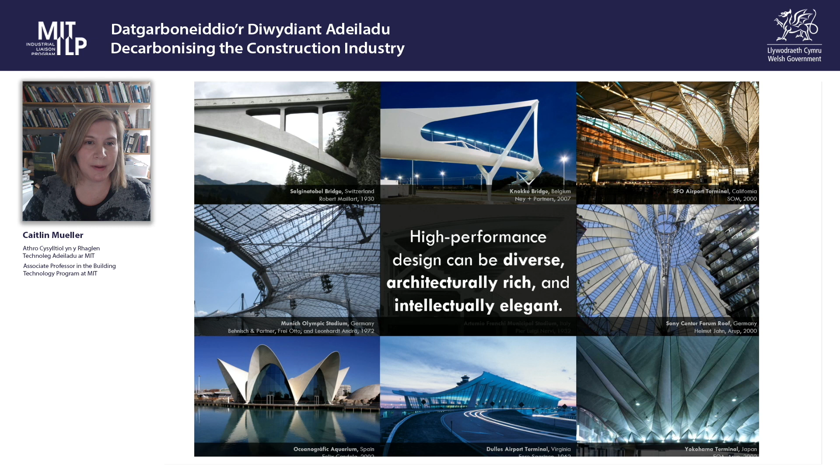And I show this when I start because sometimes when I talk about high performance design, people worry that I'm interested in a homogenization of the built environment or that all buildings should look the same. And I think it's really the opposite. We can really expand our human potential by using performance as one of the drivers in the design process for the built environment. It's also critical that we do this today. We have an enormous climate imperative to pay more attention to the performance of the built environment.

This is an example of two recent stadia built for the Olympics. On the left, the 2008 Olympic Stadium in Beijing. On the right, the London Olympic Stadium from 2012. They're both made out of steel. They're both large stadiums with the same purpose. The Beijing Olympic Stadium on the left uses 14 times the carbon emissions embodied in the materials per seat compared to the London Olympic Stadium.

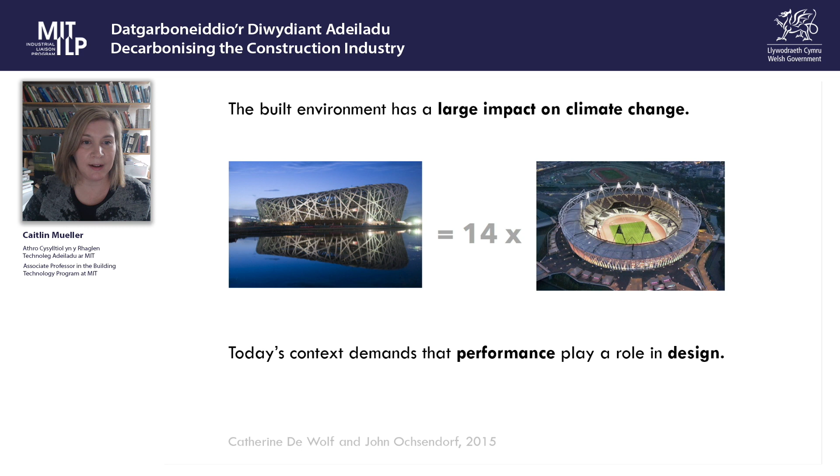So not 14% more, 14 times more. That's a performance differential that's really unbelievable. In any other sector, we would not see that kind of range. And it's because we haven't been paying enough attention to this for a long time. But today's climate imperative requires that we be more mindful about the emissions associated with buildings and infrastructure, and more particularly with the materials that we use to build them.

This is important and challenging. It's challenging to pay more attention to this because as we develop a design process, we usually don't know very much about it until we get to the end of the process. So our concept in the beginning is very open. We have a lot of freedom, we have a lot of potential, but it's very hard for us to understand how our design concept performs almost until it's too late.

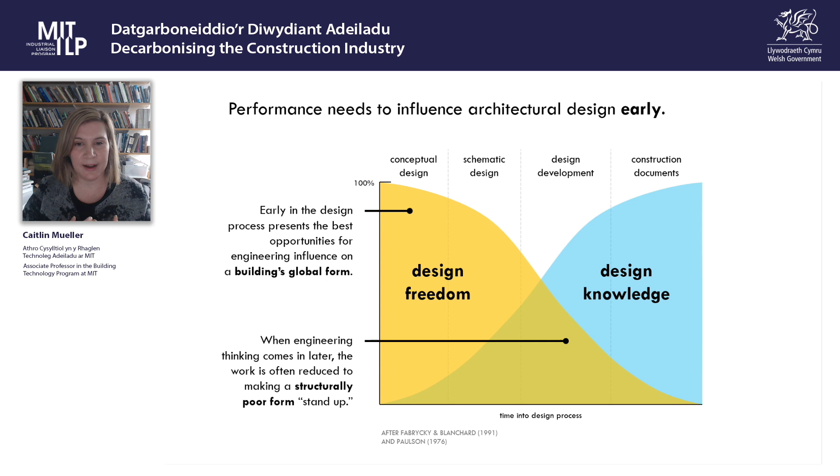And in an ideal world, we would use the principles of engineering and the principles of performance simulation as early as possible while conceptualizing a design. But too often, this happens really at the end. We're only using engineering to verify or validate a crystallized design concept rather than to help generate its key features.

This is also challenging because of the disciplines that affect the built environment that have a lot in common in terms of their interests, but are very separated and polarized in terms of how they are contemporarily conceived. So for example, the two fields that I work in, architecture and structural engineering, both work on buildings and infrastructure, literally the same objects, and yet the way they approach it are completely different and in many cases completely isolated.

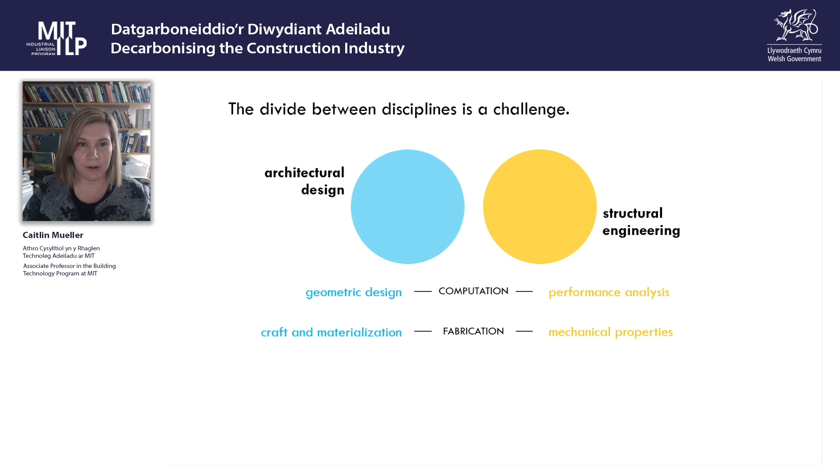So for example, the way computation is engaged is very different in architecture versus engineering. The way that we think about fabrication, construction, materialization is very different. And even the way we think about educating architects and engineers has almost no overlap. So in my work, I'm really interested in finding ways to bring these fields closer together so that we can engage a more integrated and synthetic process to lead to a better built environment.

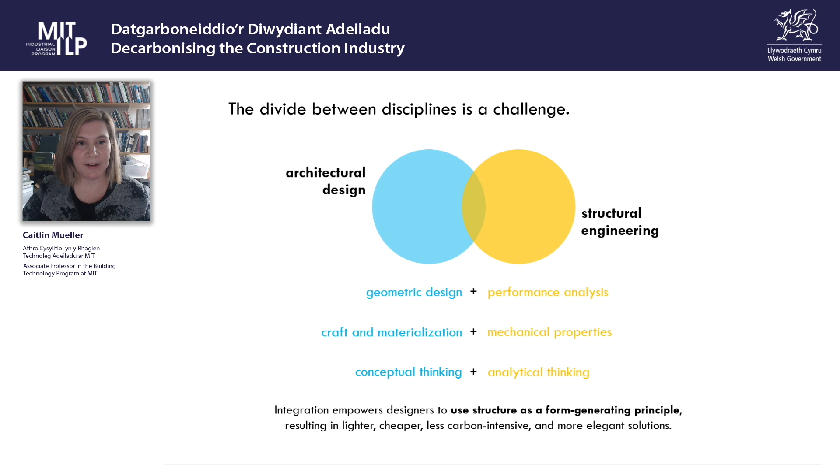And I think this is not only important in terms of the practical outcomes of using less material and using it more responsibly, but again, I also think this can advance our potential as designers and expand the palette of architectural form. I do a lot of this work through what I call the design space, and this is a computational technique for understanding both what a design's characteristics are and performance in a single kind of landscape that maps these two concepts together.

So in this example, this is a design space for a really simple structure for a truss that supports a given load. And I can change what this truss looks like by making it shallower or deeper or wider or narrower. And as I make those changes geometrically, it both changes the appearance of the truss and its efficiency. It changes how much material is required to support the load. And what these blue landscapes show is a mapping of that relationship between design and performance. This is the design space.

Using methods that have existed for decades, since before I was born, we can find the optimal solution in the design space. Those are here. There's a global optimum and a local optimum. And yet optimization methods, while very powerful, are almost never used in the design of buildings or infrastructure.

And I would argue that's because it's really hard for us to fully articulate the goals that we care about in design. We care about performance and minimizing carbon emissions and using less material. But in architecture and in buildings, we also care about a lot of other things that are really hard to mathematically express.

And so in my work, I try to balance the interest in performance-driven design with the ability to accommodate additional human considerations that are often really important in the design of buildings, for example.

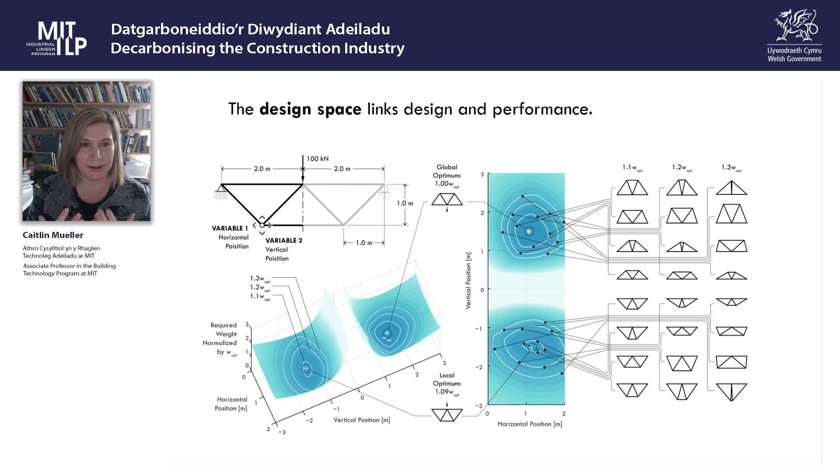In my work, I develop computational methods to try to understand and explore design spaces. This is an early tool that I built to do this called structureFIT, which designs long span trusses. You can think of them as bridges or roofs. And like the earlier example I showed, by changing the geometry of the structure, you can also change its performance.

And what this tool allows you to do is visualize a range of possible options for a truss, understand the numerical performance. Here, a lower number indicates better performance, less material required. It's normalized by the amount of material required by the original idea, so less than 1 means we're improving.

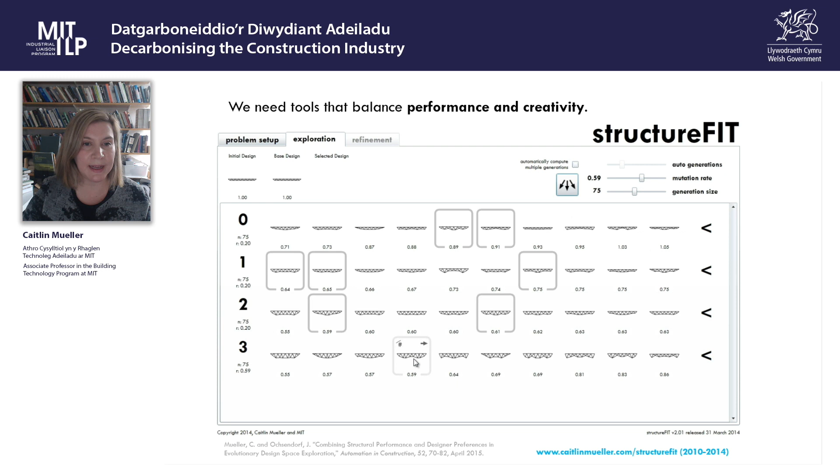And it uses an interactive evolutionary algorithm that allows a human and a computer to collaborate, to explore and evolve designs together, to find designs that meet the preferences that the designer indicates through selection, but that are also moving towards higher performance. So this is an alternative to optimization that I think is more relevant for the design and construction sector, where we're able to balance the criteria that we can express in the computer and those that rely on human expertise and intuition.

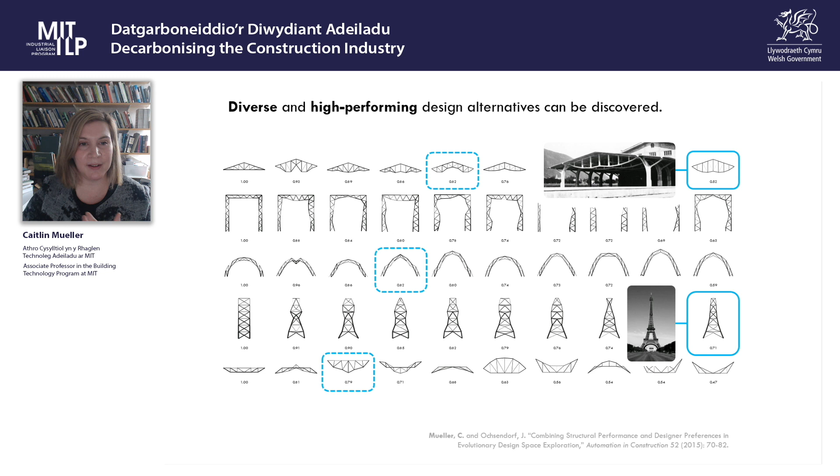But what I also find interesting about this range is that there are other designs that are not the solution to any optimization problem, but that might be the most interesting from the perspective of the designer, the occupants, human society, and that are also very high performing. So this is an approach that allows us to balance these goals and make it more relevant for real applications.

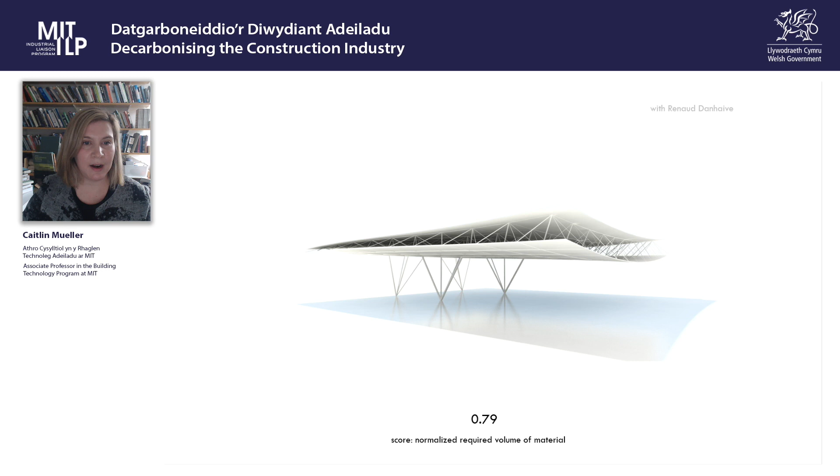When we move into more complicated structures, in 3D, for example, we can see the same principles apply, that there are diverse possible solutions that are high performing. And in 3D, there are even more possible load paths. So for example, this is what we call a design space catalog of interesting good solutions. Again, a lower number is better. Again, the number corresponds to material consumption or carbon emissions.

And what we see here is that there are so many different ways to express performance visually, and different people or different cultures or different regions might choose to use different designs. All of them are high performing, and all of them are discoverable through these computational methods.

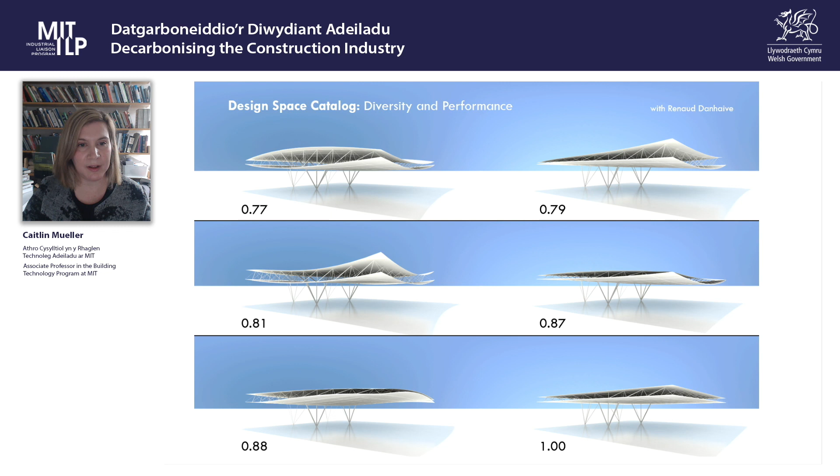We also use techniques such as multi-objective optimization, which is a method that allows you to compare multiple quantitative goals in a design process. This is really important in the design of buildings and infrastructure because almost always we have more than one goal, and often those goals are competing with each other. If we only design for one, we could seriously miss out on the other.

So for example, in this design, we're looking at a shell roof structure, kind of a long span, interesting roof, whose shape dictates both its structural efficiency and the amount of energy that is required to condition the space. Traditionally, these two concerns are studied entirely independently by different types of consultants with different backgrounds. There's very little collaboration. This technique, multi-objective optimization, allows us to start to integrate and synthesize these different concerns to find solutions that balance them.

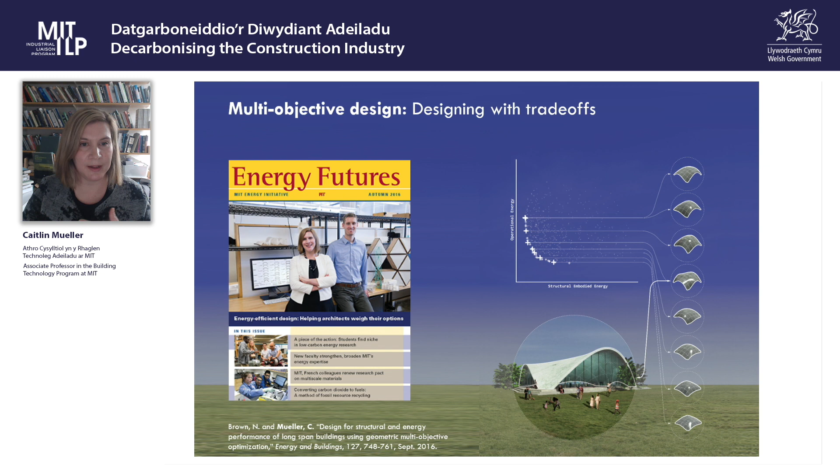What we see here in this curve, this is called the Pareto front. And this shows the designs that represent the best trade-off between the two objectives. And we use this technique widely in a lot of different applications.

We're also really interested in how to make the simulation methods that we use to measure performance more relevant and accessible in early stage design when they can have the most impact. And this is in response to many studies on human-computer interaction that have shown that when the computer is too slow, it really disrupts the creative flow, and it's not really useful in an early stage creative process.

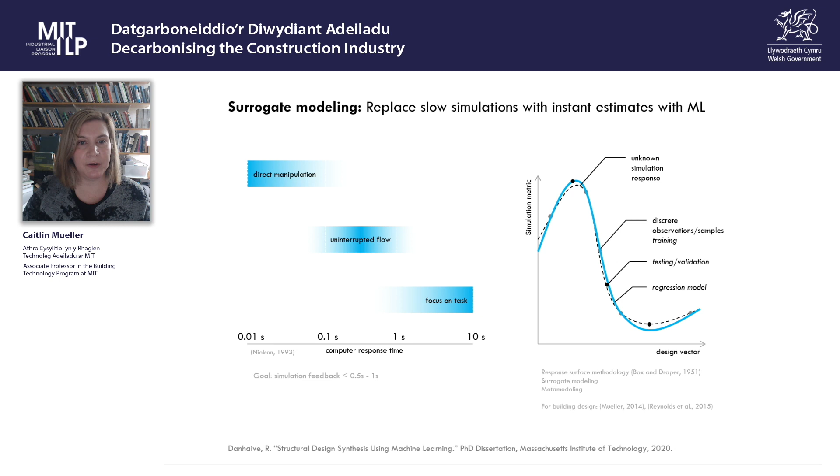And many types of simulation, cost estimation, finite element analysis, computational fluid dynamics, the kinds of things that provide important information for designers, are too slow to be used in their natural state in an interactive, design-friendly way. So we use a technique called surrogate modeling, which is a machine learning technique that replaces these important but slow simulations with a data-driven model that allows us to use this information fluidly and instantaneously in a design process through a predictive model. Here's an example of what that looks like.

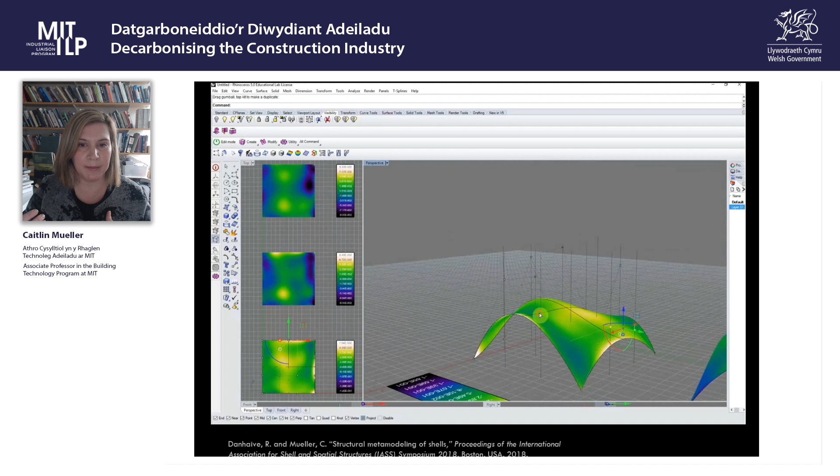Here a designer is creating another long span roof with an interesting form. The shape of the structure directly impacts, again, how it behaves, and it also affects, of course, how it looks. Here, the designer is able to work within an interactive design environment, a 3D modeling environment, and instantaneously get the results from a finite element analysis. It's a surrogate model, so it's a prediction, as they change the shape of the design.

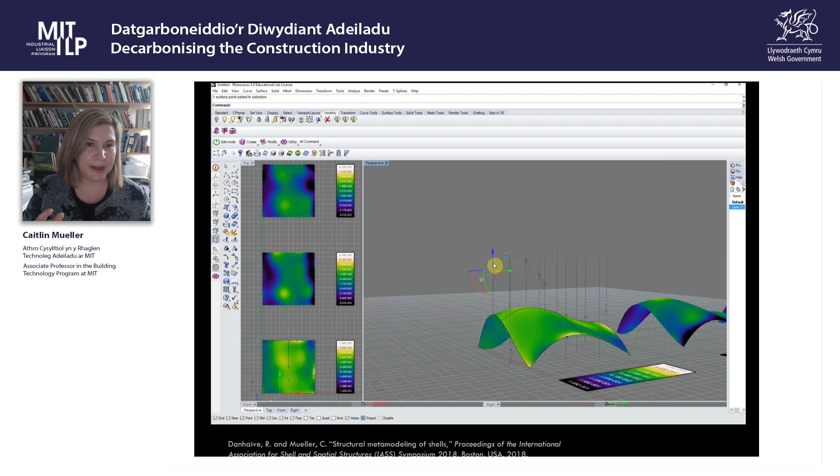Here, the color fields represent displacement of the structure in X, Y, and Z, but they could also represent stresses or other relevant information that traditionally takes place in a different software tool that is relatively cumbersome to interact with design frameworks.

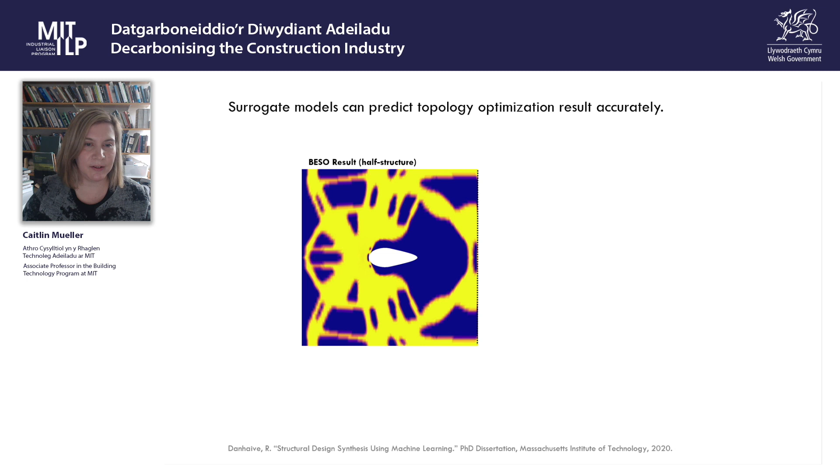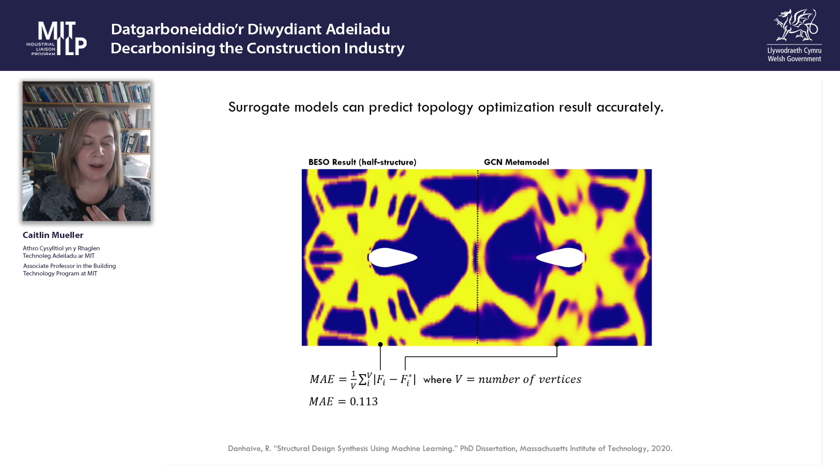We can also use this kind of surrogate model to predict even more complex fields of information for a design. Here, we're using a technique called Topology Optimization, which allocates material optimally within a design domain. For example, this is another roof with an interesting rib structure. Topology optimization takes a long time to run and is typically not used in early stage design, but we were able to build a surrogate model where we can predict the optimal distribution of material for a structure under a given load with a machine learning model that works really well across a diverse range of conditions.

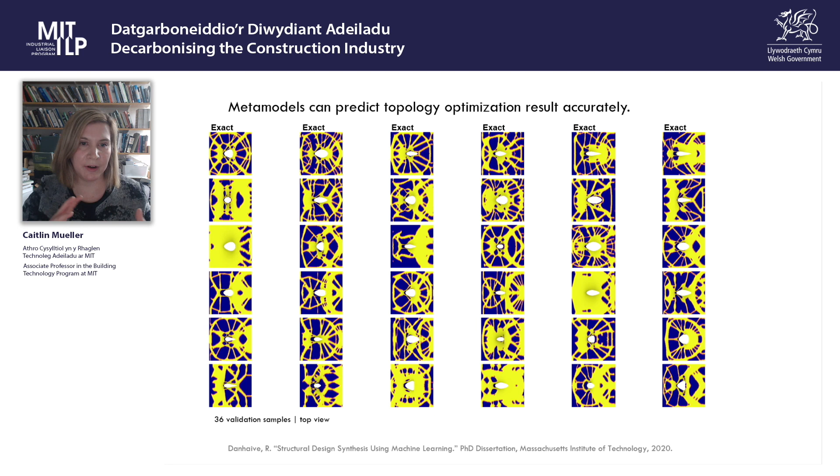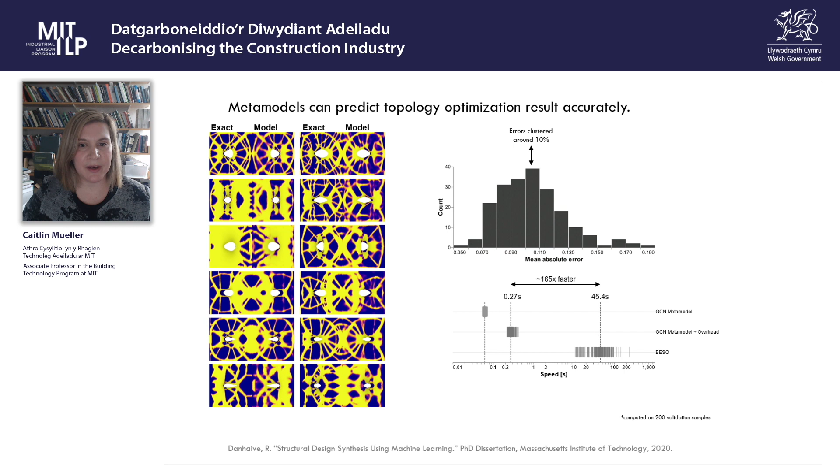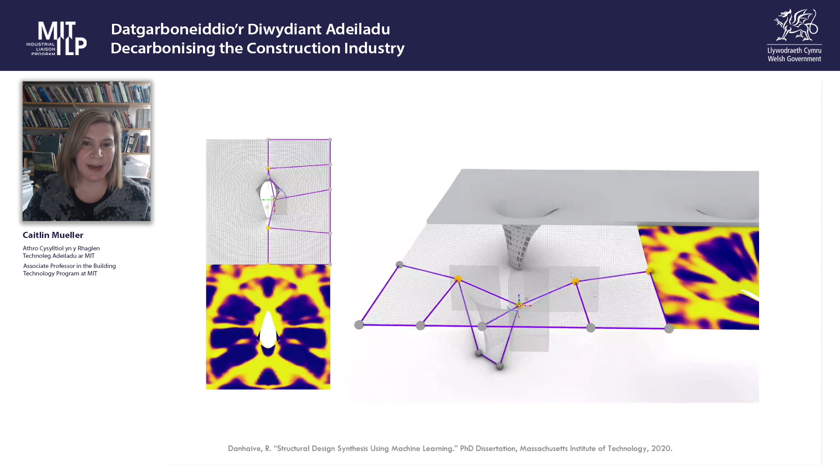So each one of these designs is the roof seen from above, and with different geometric properties, there are different optimal material allocations, and our model predicts them almost perfectly and works incredibly quickly. And the outcome of this is that we can then, again, turn this kind of sculpting environment of the designer into an environment that is also an engineering toolbox, where simultaneously we're understanding form and space and architectural concerns, but also getting physics and engineering information about material consumption and performance, and here even understanding what that means in terms of spatial and formal material allocation.

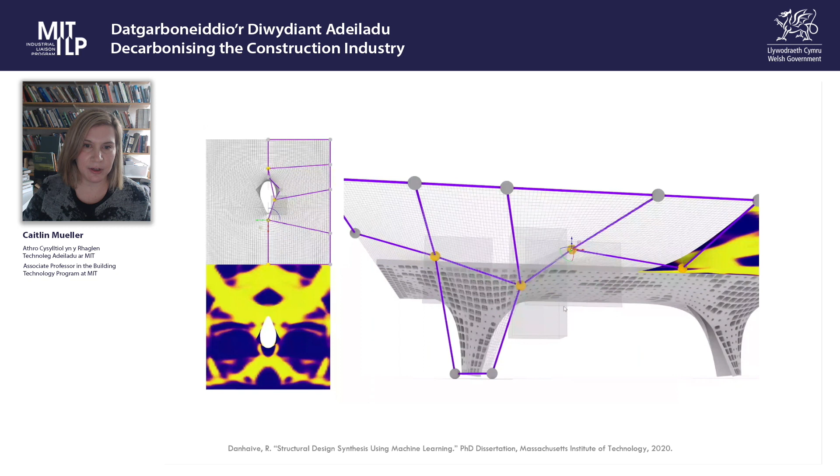This is a process that with traditional tools would take weeks or months and therefore is almost never used in construction today. But in the future, now that we can do this so quickly and in such a fluid and seamless way, this could become kind of standard in an architect's and an engineer's toolbox for early stage design.

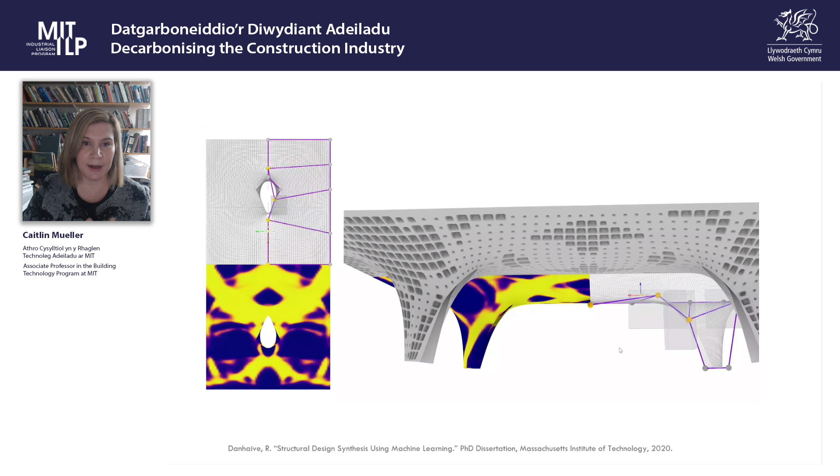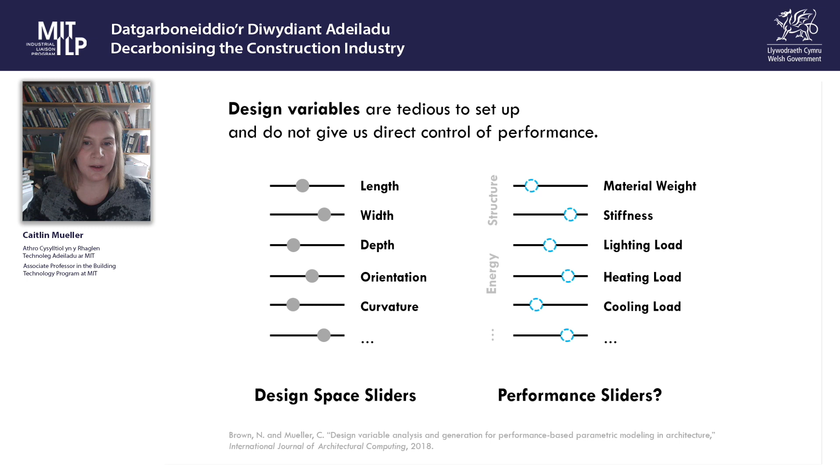We're also interested in thinking more generally about where designs come from. How do we come up with design ideas? And even today, with all the advances of computation, design ideas still usually come from kind of our own brains. But what if we could use computers to help guide us towards designs, not necessarily through optimization, but through a better understanding of the relationship between design variables and geometry and performance? Here we're proposing doing that where we start to build this inverse model between performance and geometry. And we can do that with a range of statistical techniques.

Here we're using something called principal component analysis, which is a technique that allows us to find patterns in data. So we do this by simulating large numbers of possible designs. In this case, these are structures, and identifying the directions in the design data that correspond most with the performance metrics that we're interested in.

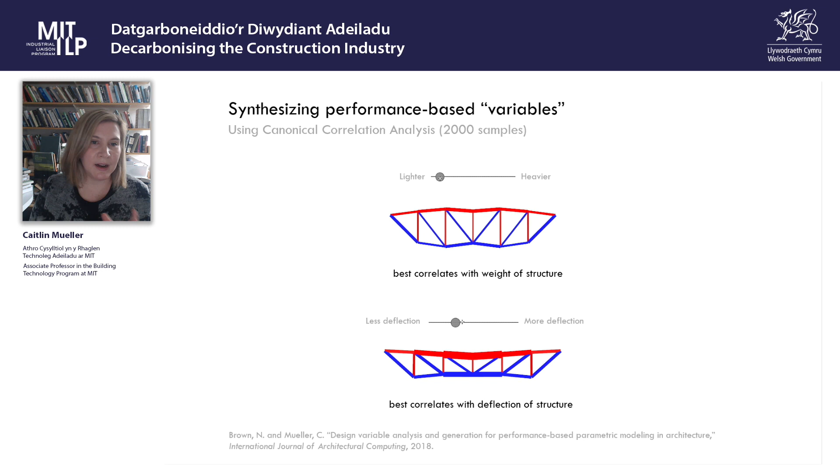And what we see is kind of a new way to understand the design space. This is a synthetic design space where the computer has pointed us in the right directions. It hasn't told us the solution, but it's helped us create our own little brainstorming tool where we can understand variations of design options and how they correspond with performance. And we can do this in even more complex ways with recent advances in machine learning, in particular with so-called generative modeling or latent modeling, where we can find low-dimensional representations of high-dimensional design data.

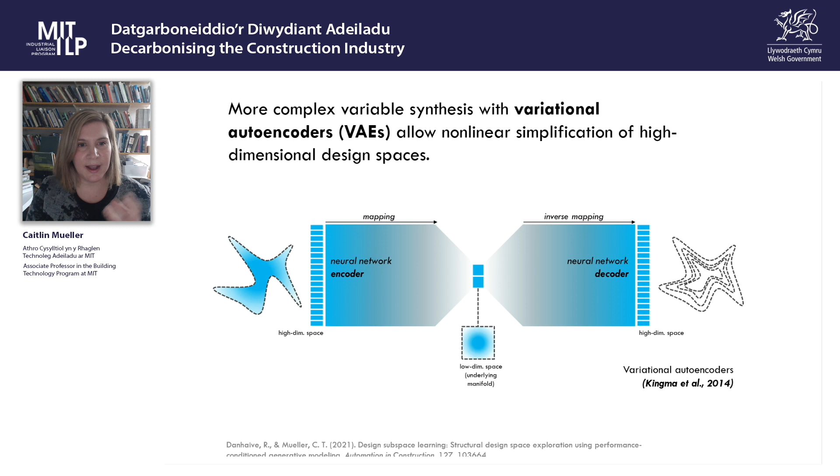So for example, a design space that contains tens or hundreds of variables and is really too hard for us to navigate as humans and understand those relationships, we can start to use these machine learning models to build that understanding and to project the high dimensional information down into what we call a low dimensional latent space, governed by performance. And I won't go into a lot of detail about what this does, but it's a way for us to create bespoke visualizations and design spaces of different design alternatives that all perform really well but are significantly different from each other, and allow us to find the relationships between them.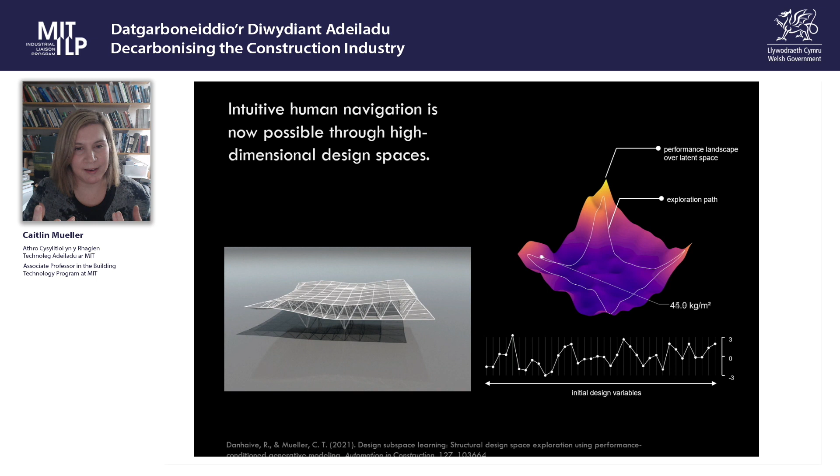So if I like a design over here in the space and my collaborator likes one over here, we can now find the pathway through the design space and start to use that as a way to compromise between these options. And here you can see this roof is morphing and changing in response to the sort of variable projection, but it's also always showing us high-performing designs. And this is a way for us to exploit the fact that the design space almost always has lots of good options. We just need to find where they are.

In addition to the work that I do with computational design and trying to make performance-driven design more accessible and relevant to the construction sector, I'm also really interested in the question of construction itself. And one of the things that I found in my own research is that almost always the designs that I'm able to generate on the computer that I claim are really high performing, that can use very little amounts of material, that achieve really high stiffness, are almost always very complex geometrically.

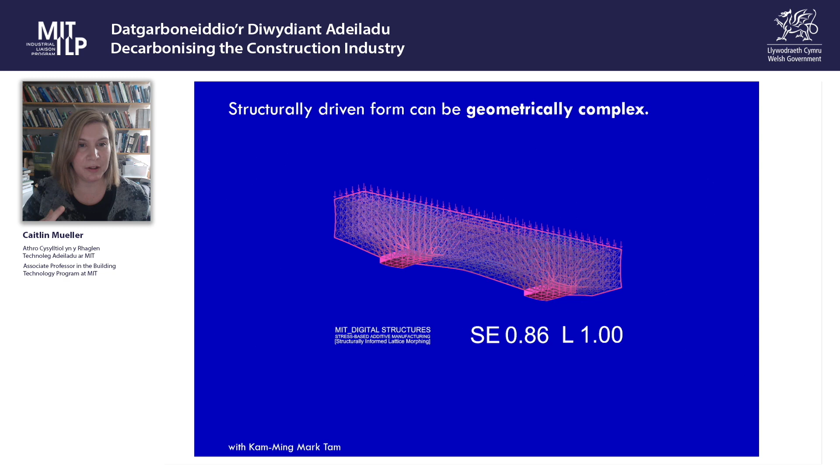And that's because the physics of structural load transfer has a lot to do with the physics of nature. When we look at high-performing structures in nature, they're not rectilinear, right? They're not orthogonal boxes. There are these curving, amazing trajectories of stress through space. And that's what these high-performing structures also look like. But they're very incompatible with 20th century means of construction, where we really prioritize standardization. So how can we overcome that? I would argue it's really important that we overcome that, that we find ways to economically build high-performance designs, even though they're complex. So how do we deal with this complexity?

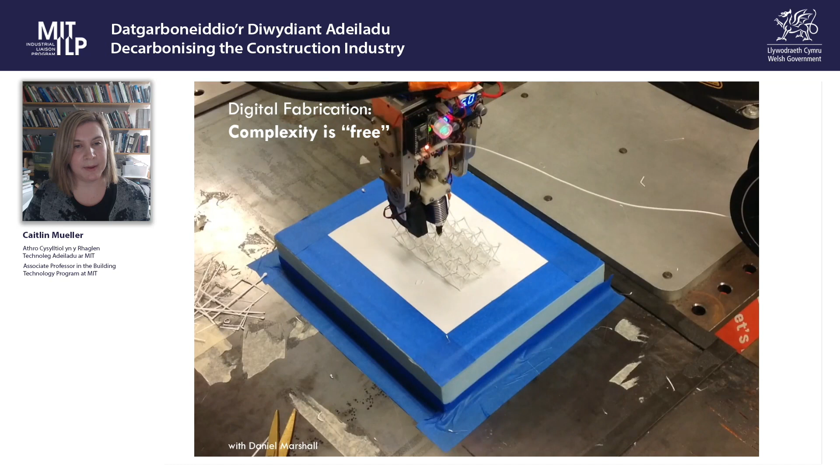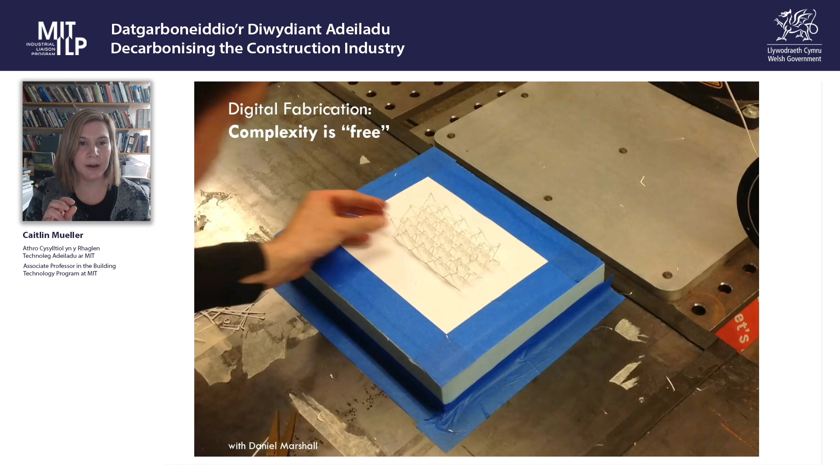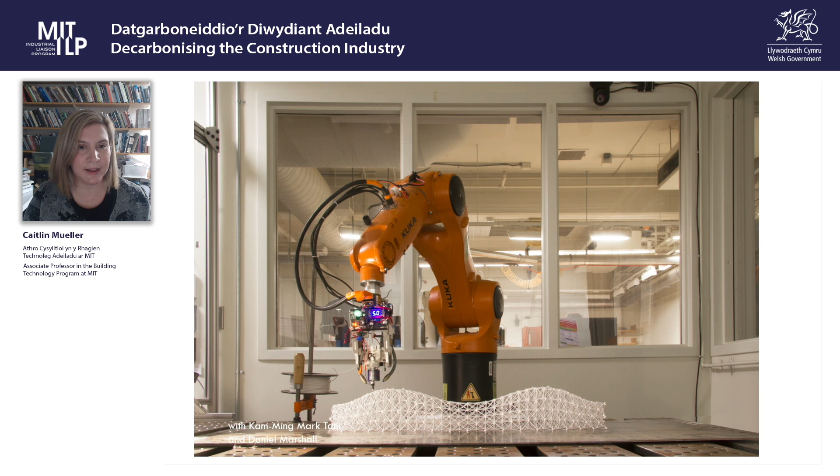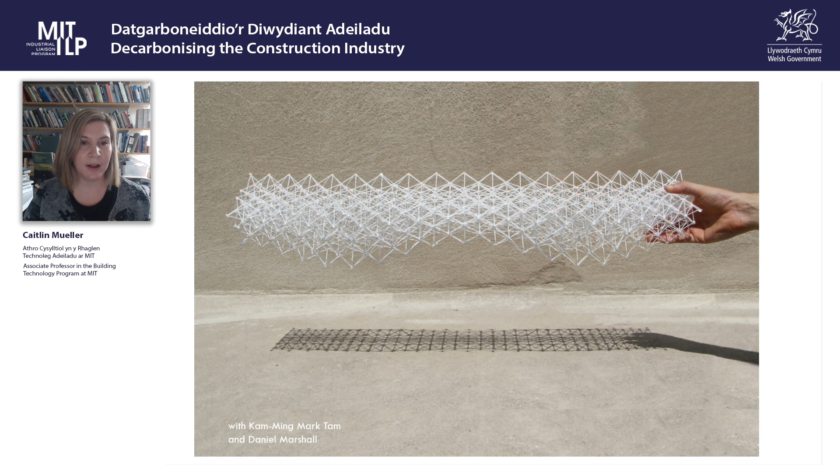One possible way forward is through automation in construction, through in architecture what's called digital fabrication or computational fabrication, where we take advantage of the dexterity and programmability of machines and use that to build structures that are indifferent to geometric complexity. This is an example of a technique we built in our lab where we mounted a 3D printing extruder to a 6-axis robotic arm and allowed it to make spatial trusses. And the robot doesn't care if every joint is the same or if every joint is different. It's just as easy for it to make this either way. And it allows us to start to really materialize these structures that we know from our computational work are highly efficient, much more efficient than their standardized alternatives, and to do so in a way that is economically competitive.

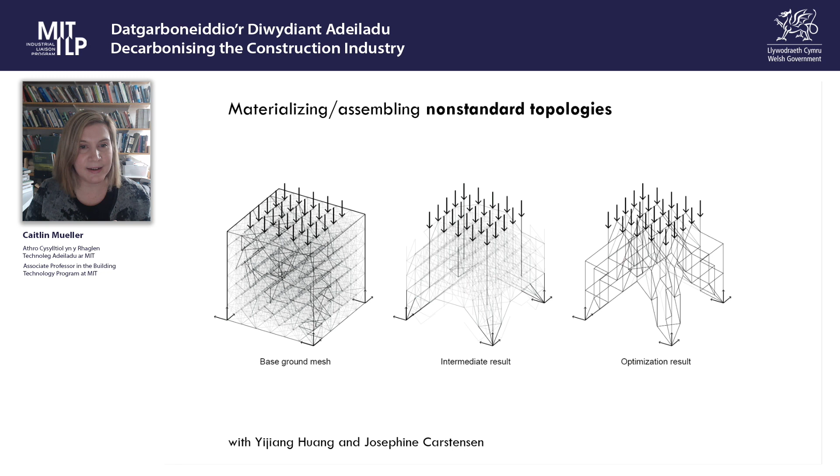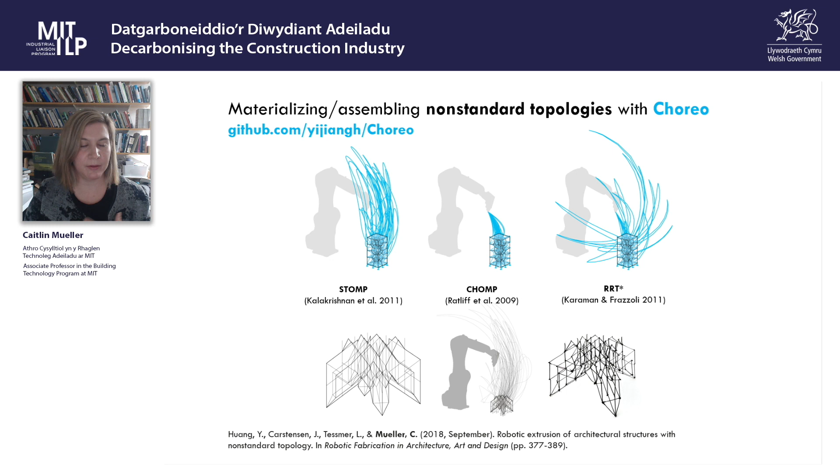We also do this for structures that are even more complex in terms of how their interior components are arranged. This is an example, again, using a type of topology optimization where we find the absolute ideal position for every element in the structure. And the absolute ideal position from a structural perspective is not ideal from a traditional construction perspective. But with robotics, we can find ways around this. And we've been working with state-of-the-art techniques in task and motion planning from robotics to automate the process of figuring out what the robot should do. We give the robot a design and we run our algorithm and compute the load path or the tool path for the robot to execute.

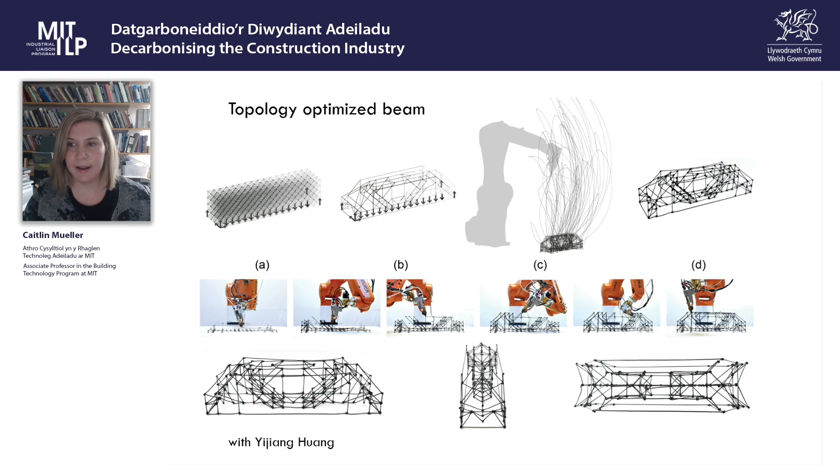And what it looks like is something like this, where we can take, this is a small model of a topology optimized beam, but the same principles apply at full scale. And we're able to build it pretty easily with a robot in a fully automated way. This is a design that if I were personally trying to build this myself with my hands, I would struggle with immensely. And yet for the robot, this is no problem at all.

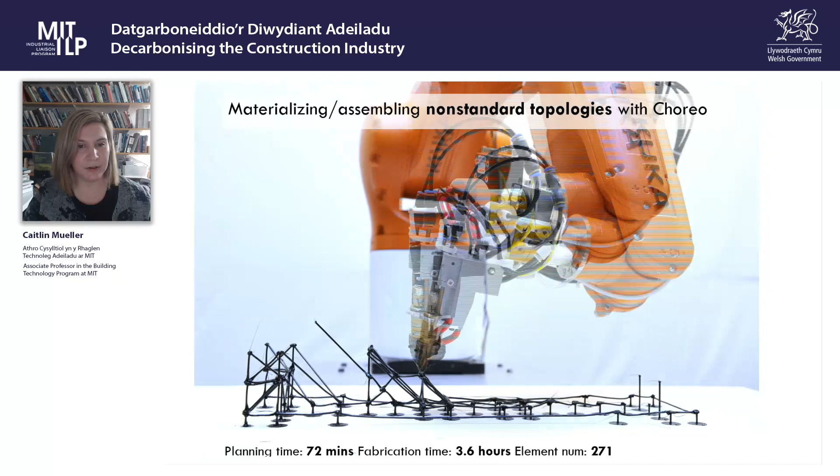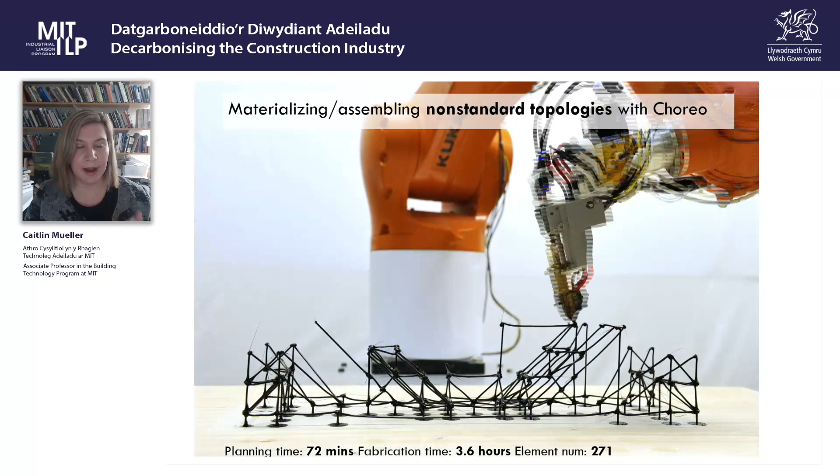And what our algorithm does to work with the robot, it not only considers how to build the structure, it finds the optimal sequence, or it finds a high-performing sequence for the structure to be constructed so that the robot doesn't collide with the structure under construction or itself. And it also makes sure that the structure is stiff enough during its partially assembled state for it to be completed.

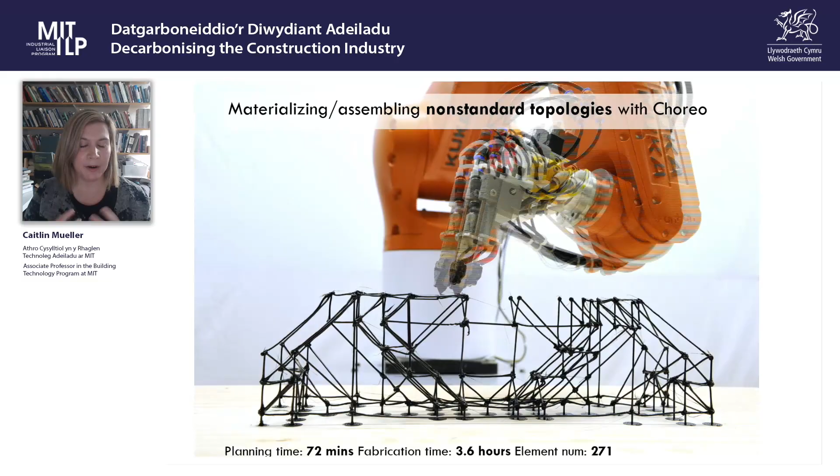So we can add all of these different constraints into the task and motion planning platform, and even have multiple robots collaborate together to create complex structures. So this is an extension of that work where 3 robots are working together to assemble an efficient but complex structure.

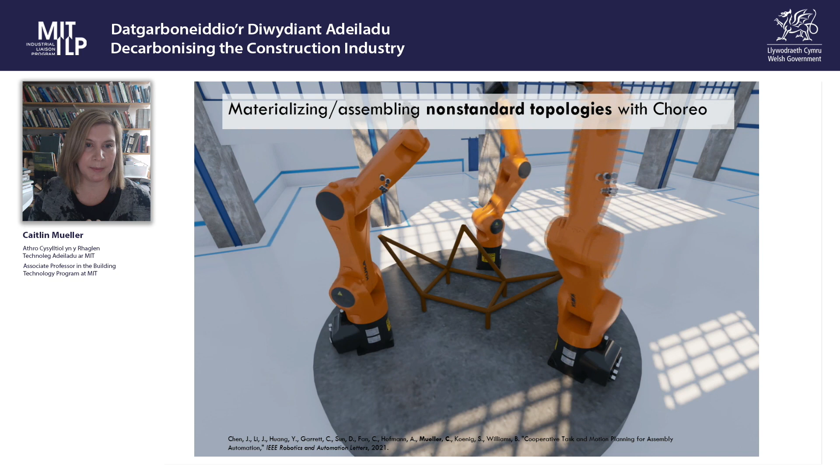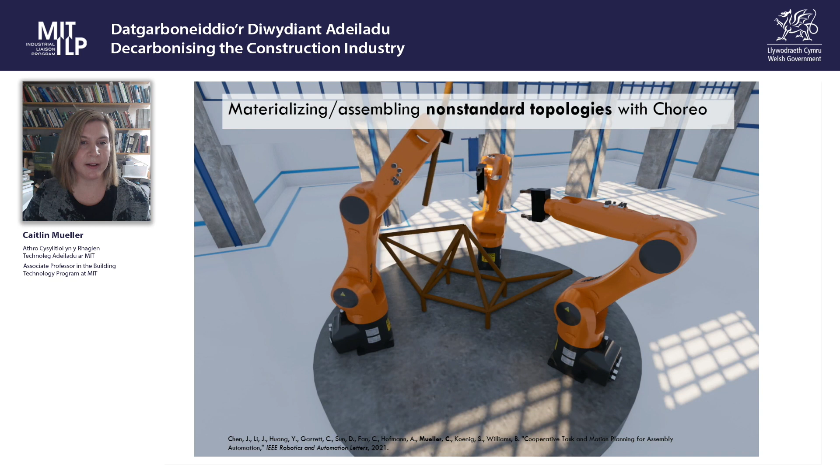The idea is not necessarily to fully automate construction. We would, for example, still have a human come and assist with the welds between these elements. But what the robotics allows us to do is to be very precise and to remove a lot of the challenge of assembling something irregular or non-standard that's driven by material efficiency.

We also apply the same kinds of thinking and techniques to more practical problems that are of urgency and impact today. One area that we've done a lot of work in is looking at reinforced concrete construction, especially in the global south, where we're seeing an immense amount of urbanization and need for housing and construction more generally.

What we see in this part of the world, and really in most parts of the world today in concrete construction, is a lot of material that's not necessary structurally, but is there in order to make construction easier. So for example, large flat concrete slabs that span between beams or span directly to columns. We know that that's not the most efficient way for us to support loads, and yet we typically do it because we have the sense that it's much easier for us to build something this way and therefore much cheaper.

But the opportunity, if we reconsider this, is enormous. If we carve away the material that we don't need structurally and find a way to build these types of structures economically, we can save 60, 70, up to 80% of the material, of the embodied carbon and the embodied energy in these systems. And in many parts of the world, material costs also dominate total construction costs.

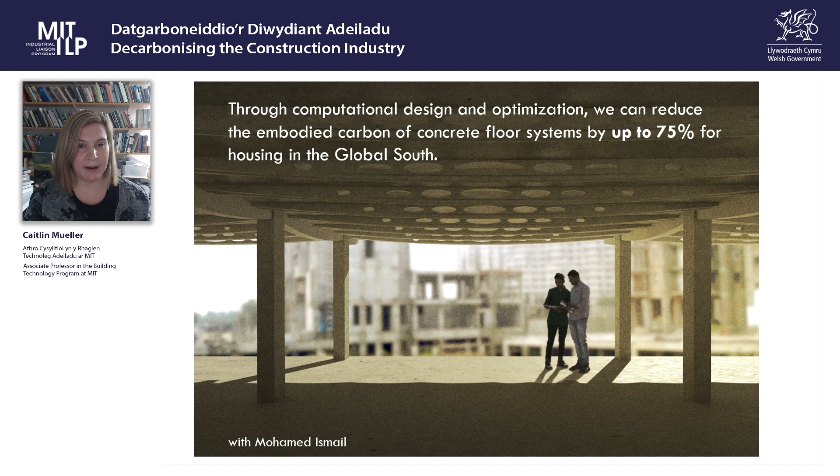Of course, in the United States, that's not true. Construction costs are dominated by labor. But for example, in India, where we've done a lot of work, construction costs are about 70% due to material quantities. So if we can reduce materials, we can also make construction more affordable. So we think it's worth figuring out how to do this, even if it means a change to the status quo. Here are examples of the types of floor systems that we've designed with our tools.

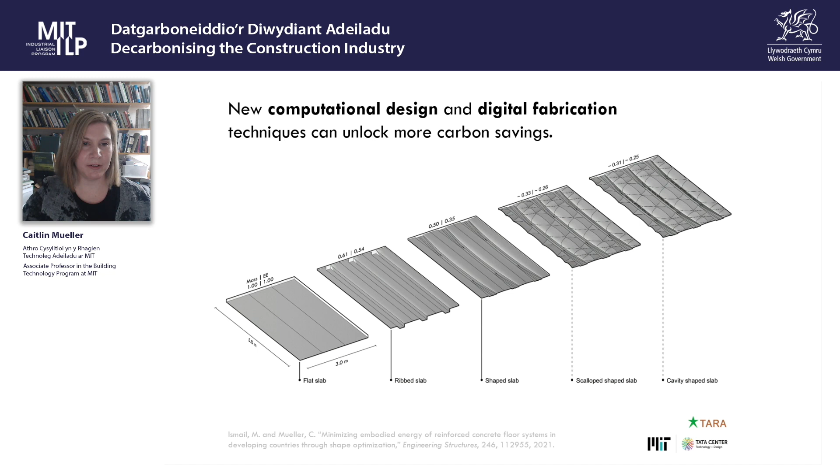And what we propose is not a single design solution, but really a platform of alternative solutions that can be tuned to different fabrication techniques or available manufacturing expertise in different regions in the world. And what we can see in general is moving away from a flat slab results in a serious reduction in mass, and EE means embodied energy. And there are different degrees to which we can push this depending on fabrication.

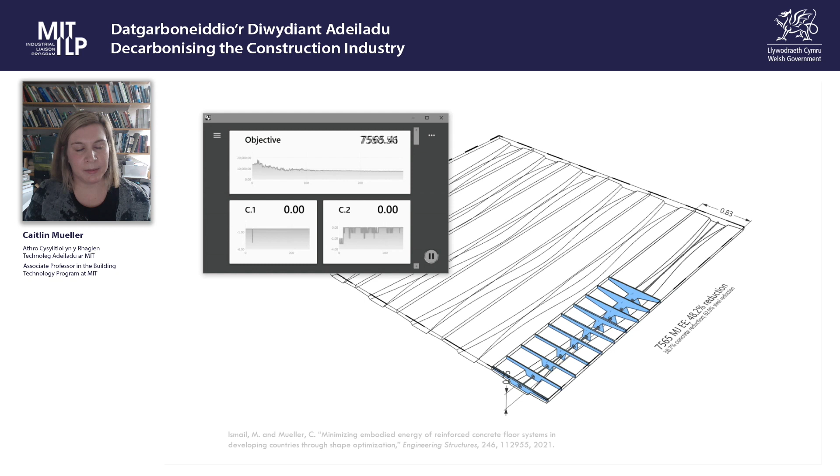This is an example of our tool, which optimizes reinforced concrete floor systems using a constrained optimization approach. What's special about our tool is that it doesn't use anything special in terms of material or engineering mechanics. It's based on today's building codes and today's widely available construction materials. Everything that's special comes from the geometry or the shape. And we can also ensure that the shapes that we are generating are fabricatable by parametrizing the structure in such a way that it meets mold making techniques, for example.

Here's an example of a prototype that we built with partners outside of Delhi. And we originally thought we would build this by using a 3-axis CNC mill to mill away some kind of formwork like a foam-based formwork like EPS. It turned out that EPS wasn't available in India in those quantities because it's so environmentally destructive. So originally our collaborators proposed using a solid block of steel that we would mill down. But we all agreed that would be very wasteful in terms of materials.

And it turned out that they had a lot of expertise making formwork out of singly curved, laser cut steel sheets that they spot welded together. This was how they built many types of formwork already. So we reparameterized our model using that technique, and we were able to build a structure that was still very high performing and that met their current fabrication expertise. They built this steel form that could be reused 50 to 100 times and resulted in about 50% or 60% less embodied energy compared to a flat equivalent slab.

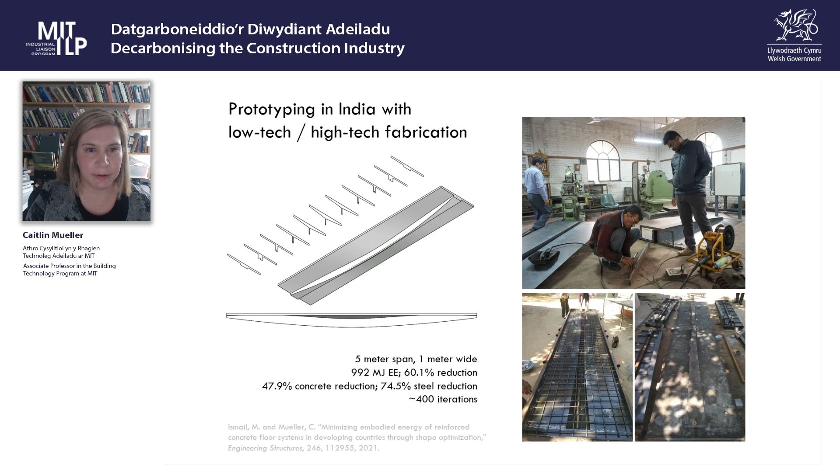We see this as something with a lot of potential as well in terms of architecture, where these beautiful shaped slabs can also start to play a role in how we think about interior spaces. In terms of how we think about energy and cooling, these slabs can also take on a thermal role. So we're continuing to explore concrete as a construction material and thinking about what its future can look like in order to reduce its environmental impact and increase its functionality and beauty in housing and buildings in general.

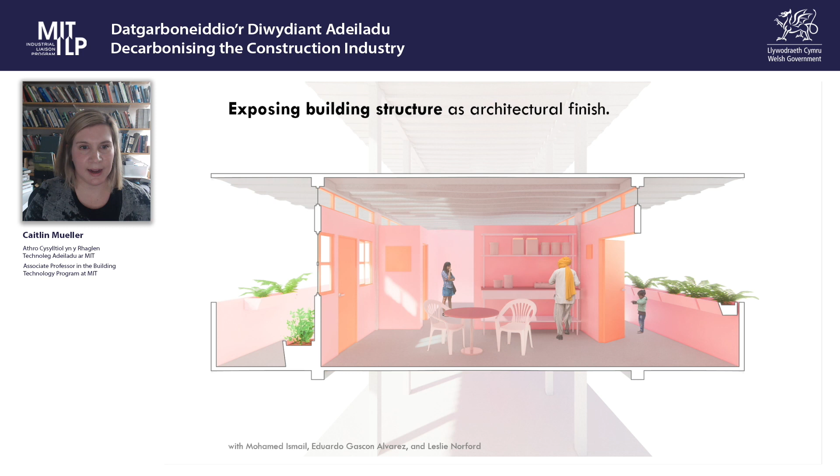And then this final project that I'll show is a little bit more speculative, that also thinks about fabrication and construction, but thinks about alternative supply chains. In a lot of our current construction practices around the world, we operate with an assumption of infinite material supply. And we've seen in the recent years that that's a pretty brittle assumption, right? Global supply chains are not infinite and can easily be broken by far-flung events.

In this project, we ask, what if instead we look at much more limited and constrained supply chains based on locally available resources? In this project, we worked with tree forks that were collected from around the MIT area, initially from a nearby city called Somerville, where they were taking down a lot of trees for the construction of a new high school, which was really politically problematic. People really don't like when a city cuts down trees, especially in an urban area.

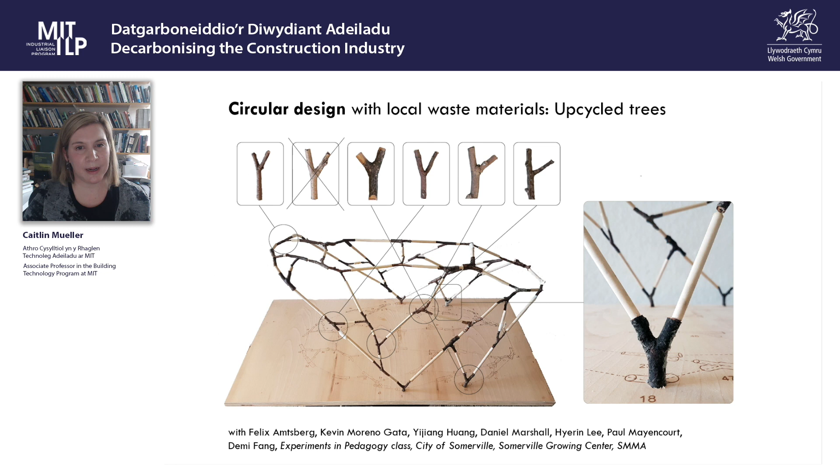And what they usually do when they cut down the trees is they chip them up and they turn them into mulch, and all of the carbon that's sequestered in the cellulose and the fibers of the trees gets released back into the atmosphere in a few years. What we instead did was say, well, could we use parts of these trees instead in a structural way? Of course, trees are used for structures all the time, but traditionally the nodes or the forks are not used because they're so irregular. It's so hard to think about how they might be used.

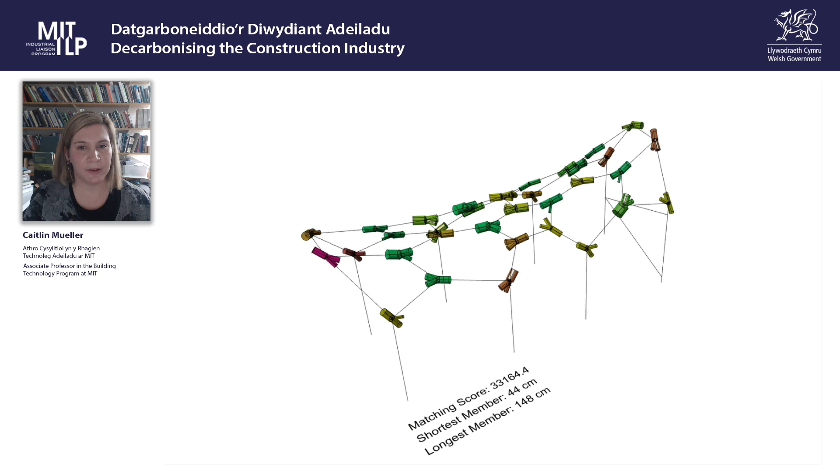But in our work, we developed a computational method based on the idea of constraints. So we said, if we have this inventory of available tree forks, what kinds of structures can we make with them? And it's a different type of process than a normal architectural design process where we start with a blank page. Here we start with an inventory and say, what can we do with it? And we developed a computational method to optimally match our inventory to a target structure and then morph the structure in response to the available material.

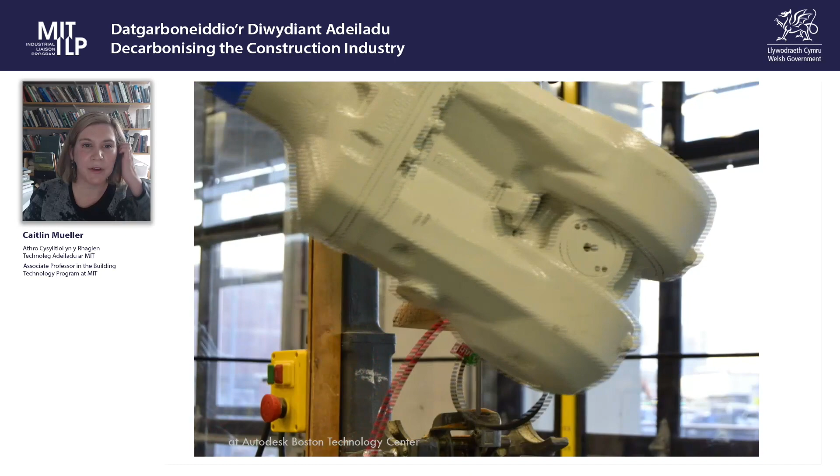We also took advantage of advances in automated fabrication again, where once we had the structural design that we liked, we were able to machine and process all of the tree forks that we had in an automated way using robotics. Here we combine a very traditional bandsaw with a very new, large 6-axis robotic arm which is able to debark the tree fork in an efficient way with a few cuts, where all the tool pathing is automated and based on the design process.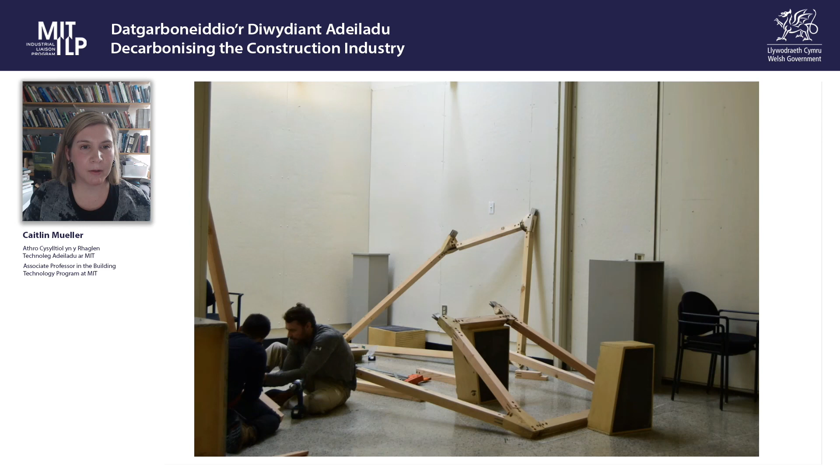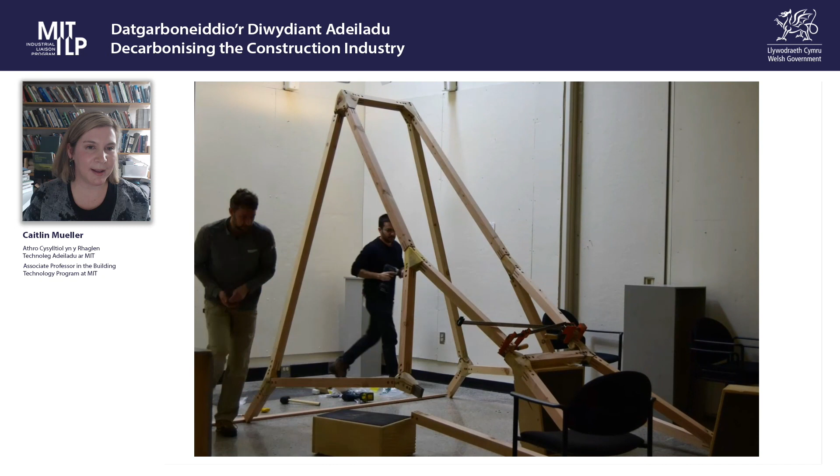And what's nice about this, even though it's kind of a very technology forward approach, the assembly is incredibly straightforward. We basically created a kit of parts for ourselves where all of the geometry is driven by these existing tree forks, and the assembly is completely straightforward because we don't need to figure out any of the angles. It's all already encoded in the joints. So it's like assembling something made out of Lego parts, except the Legos come from the natural geometry of the trees rather than a pre-established standard set.

We're also thinking more generally and in sort of a broader sense about how to do material reuse in structural systems. This is a tool that we use in our teaching for teaching architects about structural systems and carbon mitigation. Here, this is a tool that we built where we show if we had a constrained inventory of linear elements, for example, that were waste from a previous construction project or reclaimed from a building being demolished, how do we optimally allocate them to a target structure?

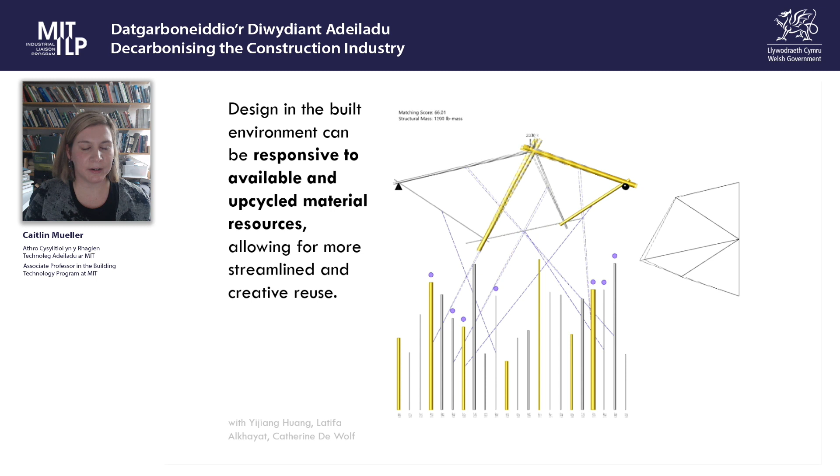This uses the exact same underlying computational method as the tree forks, but just illustrates this in a more generalized way. And this is an area where we're excited to continue to do a lot of work. But what I think is important about this is it shows that reusing material doesn't need to be a bespoke kind of impractical thing. We can really start to scale this up through modern computational techniques.

So with that, I'll conclude with some final remarks. I think performance must play a role in the design of buildings and infrastructure in architecture and in engineering. And we can do this if we combine our understanding of design, geometry, and performance driven by recent advances in computation so that we can more naturally link systematic performance-driven design, the human creativity that is intrinsic and central and critical to that process, so that we create relevant work for humanity, and we do so in a way that is economical and affordable to construct.

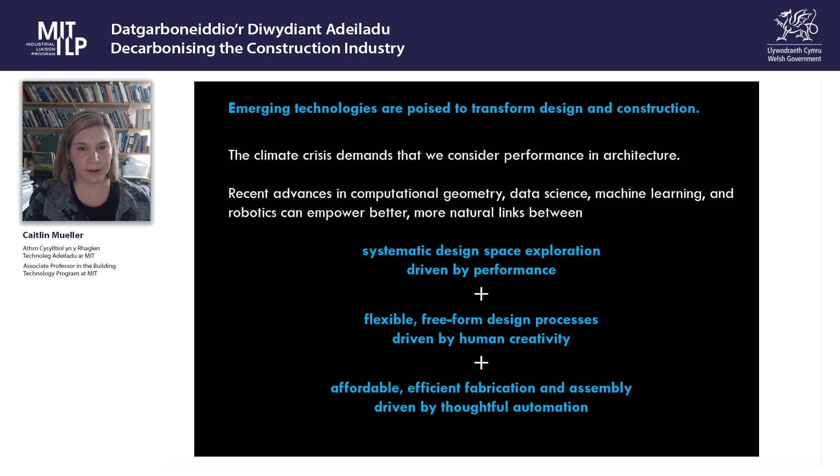Thank you, Caitlin. That was a really inspiring talk. I really enjoyed it. We've had some questions come in, if you're okay for me to kick off and ask some of them. Sure.

Okay, so the first one is relating to the tree forks that you've just been going over. They're just asking if you can expand a little bit on that, and will the forks break down over time, and how long will the buildings last for?

Yeah. Well, we know a lot about timber as a construction material because we've been using it for thousands of years for buildings and also for structures that undergo a lot of stress, like boats. So we know that trees create really amazing materials that we know how to use. The tree forks are the same material, so there's nothing fundamentally problematic about the forks themselves.

And what I think is really amazing is that their internal fiber structure is this very complex three-dimensional network of interwoven elements that is incredibly strong. On a tree, every branch is a cantilever, which was one of the hardest things to engineer. And it's the internal fiber structure that makes the moment connection, the rigid connection of that cantilever, work. So they have incredible potential as structural elements.

I always say that we could never manufacture something as complex as the internal fiber structure of a tree fork today with, for example, what we can do with 3D printing. We're very far away from that. All of the effects of anisotropy and the composite nature of the material are handled through the organic nature of tree growth and the performance of the tree.